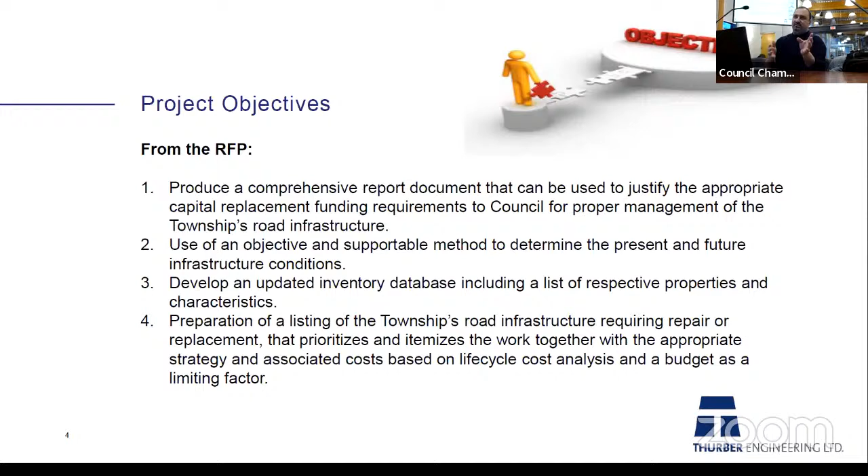We went through the development of an updated inventory. So that took a bit of work at the front end just to make sure the database was correct and erroneous data was taken care of. And then we came up with what I would call not necessarily a prioritized, but an optimized scenario list of roads that we presented to you for repair, that you can then select which scenario you'd like to do. Each scenario is slightly different, and we'll talk through the funding requirements versus the deficit that follows each of those scenarios. Next slide, please.

Next two slides. Okay, so yeah, that's perfect. So this was our collection vehicle. So we send out two persons, one of which is a pavement engineer when we carry out these assessments. The objective is to drive every road, every kilometer of road, and visually assess them by eye. For this particular assignment, we also took photographs. So this is an example you can kind of see in the middle, and then the upper corner.

We had two cameras on our vehicles. I think for this one, we only did one camera. We didn't need to do any rear facing photos, but this is what we would do if we did front and rear. So one of the objectives was to photograph every 5 meters, every road within the Township of Springwater, which we did. We still have to discuss how we're going to transfer those files to you, but Dan and I are still going through that.

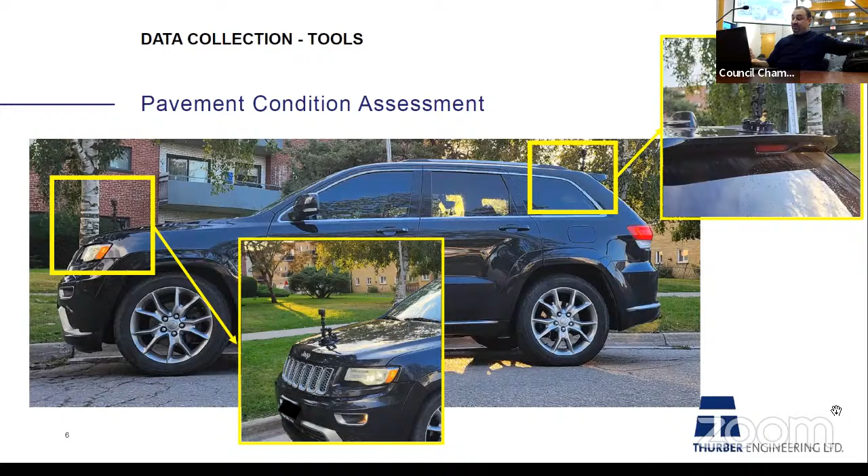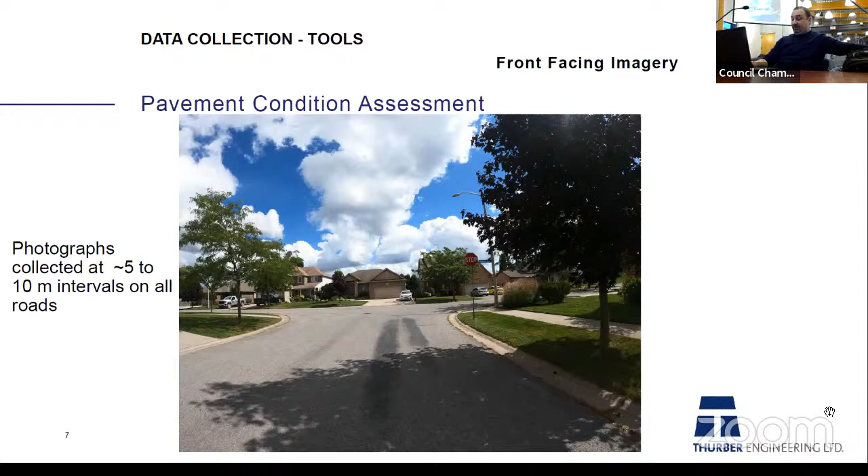In addition to this, next slide, please. I'll just show you some of the imagery. So this is some of the quality of the imagery. They are GPS enabled GoPros that are being used for this assignment. And again, for every 5 to 10 meter intervals, it's a lot of imagery, quite frankly. But the resolution is quite good. If you can just flip through the slides there, Jen, please. Okay, right there. That's good to stop.

So in addition to the photos, some of the other technology that we used was this handheld app that you put on your phone. And so what this app does is it takes the accelerometer in your phone and it will measure the roughness of your road. So as you're driving around, the phone will be vibrating slightly, and it's measuring how rough or smooth the roads actually are. So what that is generating is what we call a riding condition index. Okay, so an alternative to this would be, and this was a requirement of this project as well.

An alternative to this would be the raters in the vehicle assigning a value from 1 to 10 based on how they feel the road is as they're driving along. Quite frankly, we do that as well because we don't always trust the data given to us. So part of our QC checks is to compare what we actually feel. We've done enough roads; we have a pretty good assessment of how our body shakes in the car.

But we do go back also because sometimes the data that we collect doesn't always come through. There's always going to be some error that could happen. So it's one of our QC checks that we rate the roads by eye, and when we're doing the assessment of the roughness, we also rate them manually as well. So these parameters, the roughness and the distresses that we are observing in the road, are used to calculate what's called a PCI.

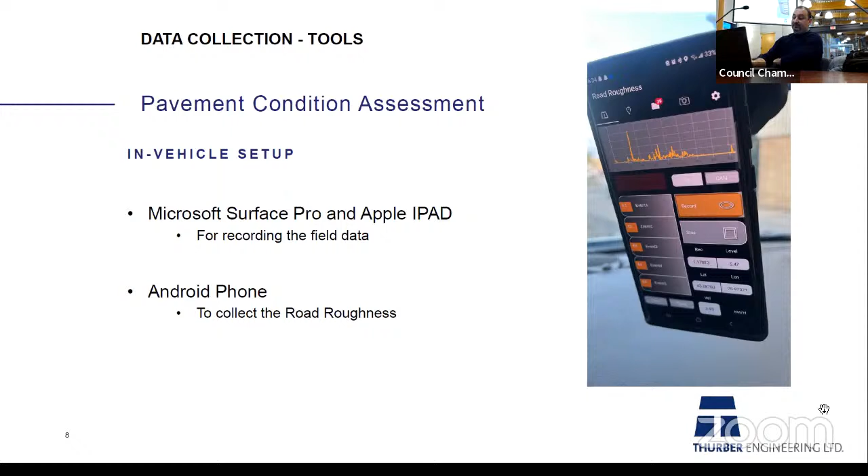So I'll just go through. Just for the record, this is the setup that we use. This is a Samsung phone with a specific mount that we mount to the windshield, so we can see everything that's going on at the same time. Next slide, please. Again, this is pretty quick.

So on the left-hand side, you'll see the manuals or guides that we followed. For all asphalt roads, we referred to ASTM per the RFP specifications. However, ASTM doesn't cover gravel or surface treated roads, so for those roads, we use the MTO manuals. MTO does have a manual also for asphalt roads, but for this particular assessment, we used ASTM.

Regardless of the method used, when you look at the center, the asphalt pavement, or even the gravel or surface treated, what we're assessing for is the type of distress or deterioration that we see in the road. So cracking, how bad is it? Low, moderate, severe, or high. The density of it, which means how much of it do we see.

With the ASTM method, it's a bit more cumbersome because we not only assess the type of distress that we see and the severity of it, so how bad it is, but also we quantify how much we see. And again, it's more of a manual calculation. MTO's method doesn't necessarily do that. It just says, okay, is it 15 to 20% of the road experiencing this, or more than 50%? It's a little bit easier to do. But the end result is generally the same.

On the right-hand side, the equipment that we used, I showed you some of it. That app on the previous slide is the Rubix app. Rubix is an app produced by a company called Rival Solutions. I'll get into them a bit more later on. Phone cameras, typically we're using any tablet, phone camera, or even a laptop, depending on what we're doing.

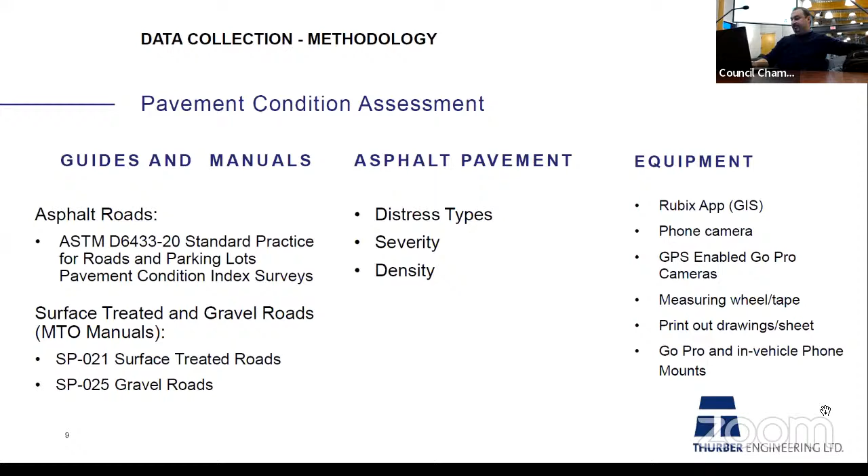So these are the sheets that we collect. Again, these are the MTO forms. The ASTM forms aren't very nice to show; these are a bit more clear. The premise is the same. Basically all the types of distresses are listed, whether they're slight, moderate, or severe, and the extent, so how much of the distress did we see. So whether it's ASTM or MTO, the methodology is generally the same. The output is the same.

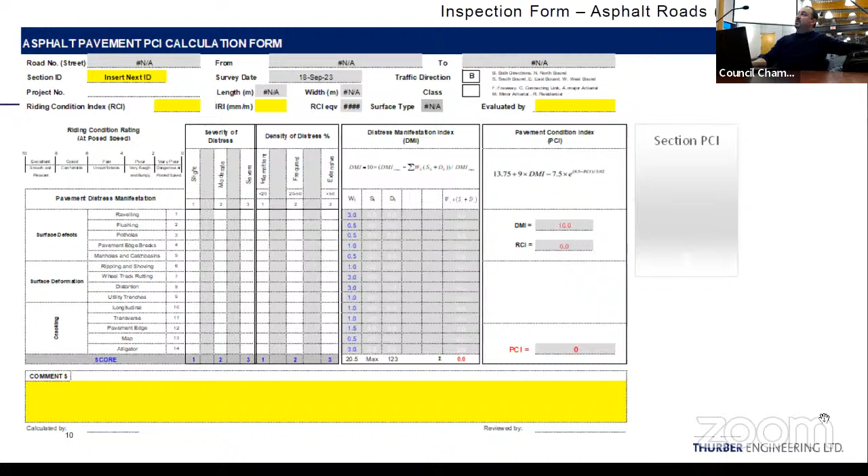If you look in the lower part, where it says PCI, that's the calculation output. We're going to talk a lot about PCI, which is Pavement Condition Index. So don't worry about it right now. Park that, and we'll come back to it. The next two slides, Jen, please just push through, you can skip that one. That's for gravel and surface treated roads. They're generally the same. I just wanted to post them up there so you'd have them.

Next slide, please. So once our assessors in the field bring the data back into the office, we go through a gap analysis and make sure no data was missing, or if there's any erroneous data.

Typically we like to refer to the previous study and see, did a road that was once assessed as a PCI of 100, which is perfect, drop to a 50, which would be basically catastrophic, in 3 years? So I personally go through the data, or another engineer, and will actually do a 10% drive of the entire road network again, just to check the data to see if I'm seeing what I'm seeing. And I'm going to get into what these numbers mean a bit more, so this will be a bit more clear.

The other thing that we did, and we spent a lot of time doing, is the GIS shapefile. The shapefile, when we first got it, it wasn't bad, but there was duplicate data, which could pose problems when we're generating capital plans, because you may have two roads in there that get hit twice. So the capital plan's not even. So we spent a lot of time cleaning up that data.

When we're doing the road analysis, typically with GIS, it's a road from and to. So it's typically intersection to intersection, generally. But sometimes there's overlapping, as you can imagine. We don't always pave intersection to intersection. We may pave 400 meters past the intersection. So we have to double check that those variables are getting calculated and carried as well.

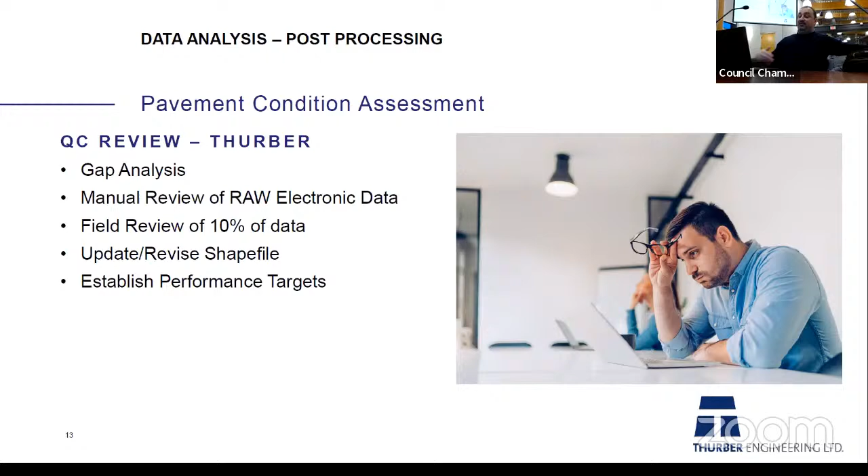And then following that, what we do, and Dan and I did this together, is we establish some performance targets. There's general performance targets that we use in industry. However, each municipality is able to do what they want, and they have some standard ones that they use. So that's what we did. Next slide, please, Jen.

So performance targets are essentially what type of treatment are we going to introduce at what time? Okay, so keep that in your mind for now, and I'm just going to focus on the right-hand side of the presentation for now. So PCI, again, pavement condition index, is a rating from 0 to 100. It's pretty straightforward, and this is global. So anywhere you go in basically North America and parts of Europe as well, they use a very similar scale. The scale you see on the screen is the ASTM scale.

MTO has a similar scale. It doesn't have the same PCI categories. So for instance, it doesn't have a 0 to 10 failed category. They kind of group a few things together, but that's okay. This is fine. So what's important here is to understand when we are interjecting in the pavements. So you can see that any roads that have a PCI rating of 71 to 100 are good or satisfactory. Those are our preventative maintenance treatments.

So preventative maintenance is essentially things like crack sealing, pothole fixing, maybe microsurfacing, just on HMA roads, or maybe you're just scarifying gravel roads. So we have a specific set of criteria we're going to fit into that category. Then we get into the rehabilitation category, which is the poor and the fair. So 41 PCI to 70.

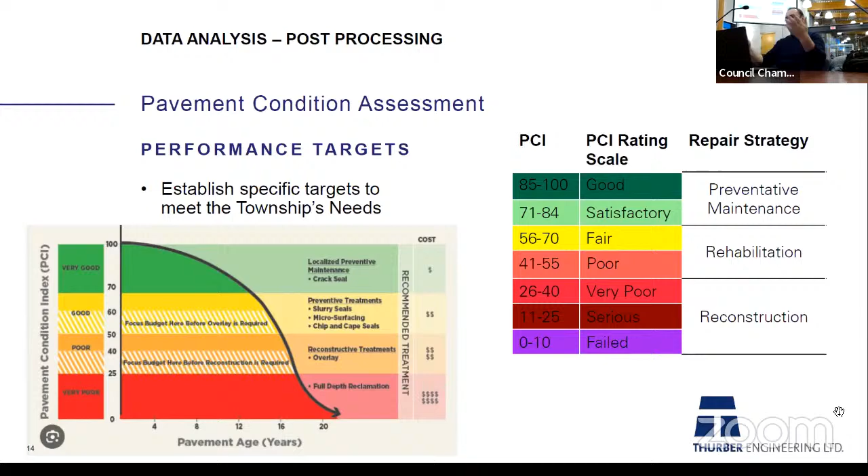Okay, next slide, please. So Rubix, again, Rival Solutions, we've partnered with on this. They're one of our two sub vendors that we used. Rubix is the name of the software. And again, for this assessment, what they did for us was we could store all of the photos that we took georeferenced into their app. So they're currently on the web, and they're available.

And they also calculated, it's in the second bullet down, the road roughness, international roughness index. So we did calculate, I mentioned road condition index or ride condition index. IRI and RCI are very similar. There's specific formulas that are used to relate them back to PCI. So essentially, to make it very simple, the DMI, the distress manifestation index, is how bad your roads are in terms of visual distresses that we see. So how much cracking we see, the type of cracking, the type of raveling, rutting, etc.

We take that and we assign that a number. Then we take the IRI and we assign a number to it. That's how rough your roads are. So as you're driving your roads, how bumpy or smooth are they? We take those two values and we plug them into a formula and we generate the PCI. So the old way of doing it, again, is very subjective. It's me driving your roads and saying, this is a 72, this is a 50, this is a 49. This is more of a calculated method so that it's reproducible.

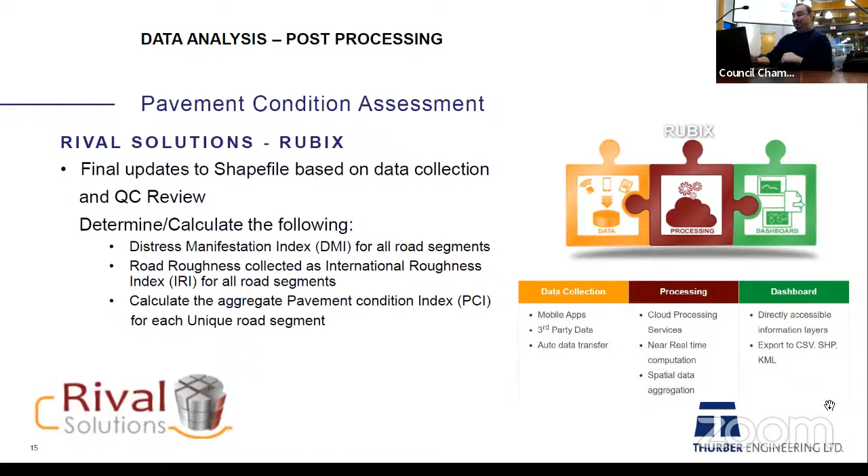Next slide, please. So your network. Yeah, okay, perfect. So I've tried to put the rating scale on the left just as a reminder throughout, because I know it's maybe the first time for some of you that have seen it. These are just some images that we pulled from the software that we're using. So basically, that's the Springwater network. And again, this is a web-based app.

Another vendor that we're using, we plug all of the PCIs into their software, and that's the capital planning tool that we use. So this is actually from their app. They just took a screenshot of it. So basically all of the green roads, and I would say yellow and green, those are your fair to good roads.

So you can see just visually, the network's in pretty good shape overall. Yes, there's going to be red roads, and that's fine. Elmvale's pretty green, but you can see it's got a variability; there's one failed road, but off the top of my head, I can't remember the name of it. And then we go down to Midhurst, and there's actually a lot more red in Midhurst.

So this is typical of any municipality. But it also can show you just visually, if you didn't want to look at this capital planning, where we could spread it around. But if we went with the old method, we would just take all the red roads or purple roads and say, okay, fix all those. But what's going to happen if you do that is all your other roads that are in the light green or the yellow are then just going to drop to red. You're going to end up in a very bad place spending your money.

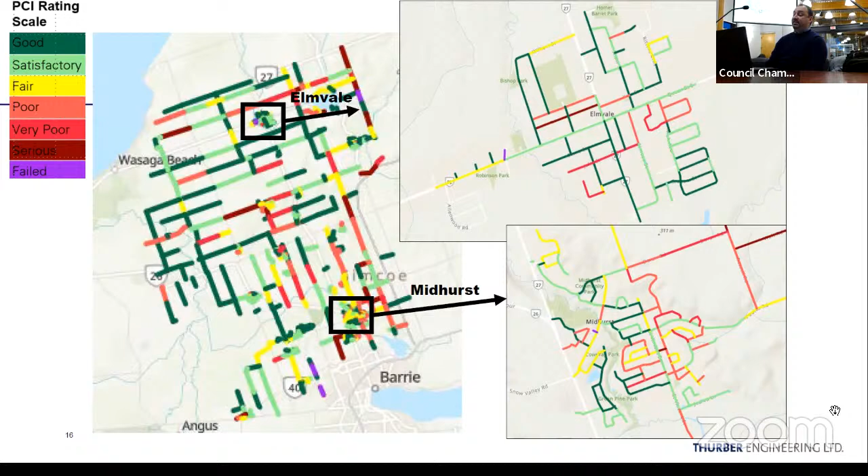This company has done, oh, next slide, please. Sorry, Jen. I'll apologize. Yeah, there it is.

This is from their web-based app, and this is the dashboard that we see when we first come on. So your network overall is on the top left, and I think I have these zoomed in per slide, but we'll go through them quickly. Your overall network from a PCI rating out of 100 is 72. It's called satisfactory, but really that's a good network. If you're at a 72, you're in a good place right now. If you're at a 50, there's a lot more spend that needs to be taken care of.

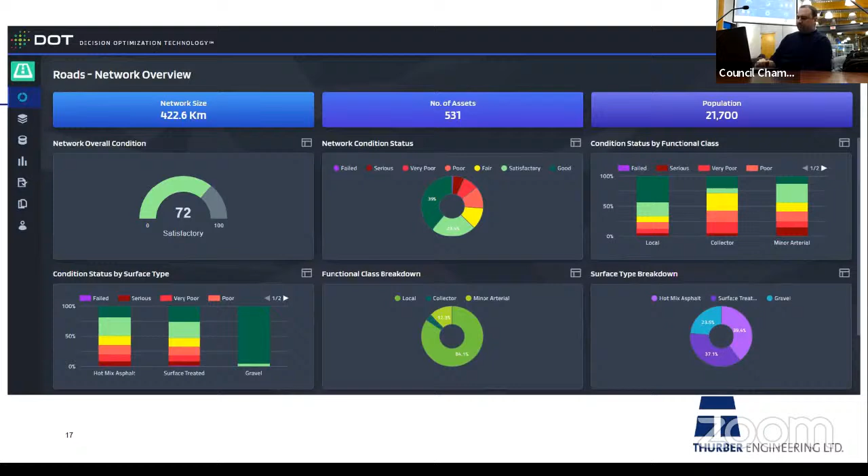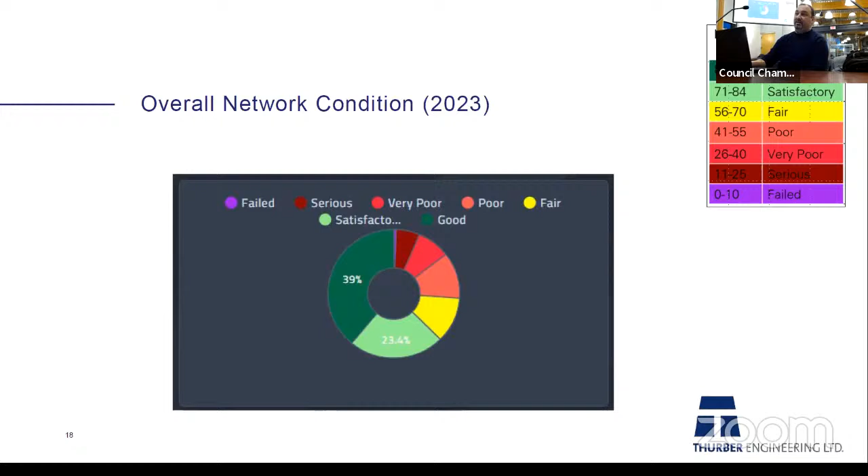So as we go through, Jen, if we could just go next slide, I'll just zoom in. So this is a pie chart of the network condition, and this is based on kilometers of road, not number of road segments. I should be clear about that. You can see there's one sliver of failed road. It's a very small amount. But predominantly about 63% of your roads are in the fair to good category. So part of this is going to be understanding how we take care of those roads moving forward.

Next slide, please, Jen. I'll just go through these quickly. This is a bar chart, just another way to look at it, of the functional class. Functional class being per the township official plan, we have local roads, collector roads, and minor arterial roads. There could be more depending on the municipality you're in. These are specific to the township. And so on the left, your local roads are the first bar. You can see about 70%, or maybe more, 75%, are fair to good.

So your local roads are your residential streets, if you will. And then your collector roads are all your connecting streets. And actually in the township's official plan, they're very specific as to which roads these are. You can see there's a greater amount of roads that are in the poor to failed or poor to serious condition. And then the arterial roads are almost 50-50.

So what's unique about the software is, with a worst first approach, you would just rate your roads PCI 0 to 100 and fix the worst ones. What we can do in the software is say, okay, you know what? Our arterial roads are our money-making roads. Those are our major routes being traveled by industry and people moving place to place, in and out of the township. We want to put slightly more weight towards those roads. And then you can assign, say, 55%, then 50%, 40%.

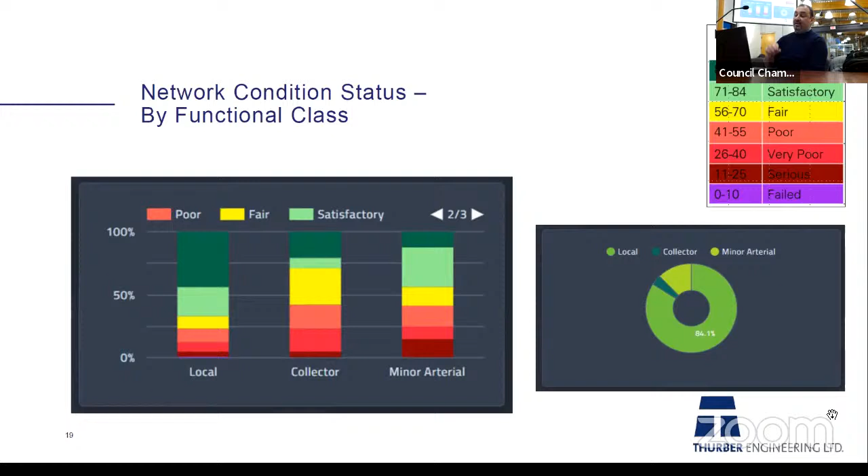You can put the weighting differently for each type of functional class. And this is going to be the story. Next slide, please, Jen, as we go through.

So for surface type, same thing. You predominantly have hot mix and surface treated roads. There's some gravel roads. They were typically in good condition. This is the uniqueness of the condition assessment. Depending on when we go out to do the condition assessment, you may have just graded all of your gravel roads, so they may come out, and that's fine. It's gravel roads. We know they're part of a regular plan every year, but this is why the gravel roads are in great shape, and actually that helped drive your network up because I think they rated out at about 96 PCI on average.

But your asphalt roads, they're pretty good too, so that's good. I mean, your surface treated and asphalt roads are from good to fair, well above 50%. And again, this is why your overall network condition is a 72. That's satisfactory. Next slide, please.

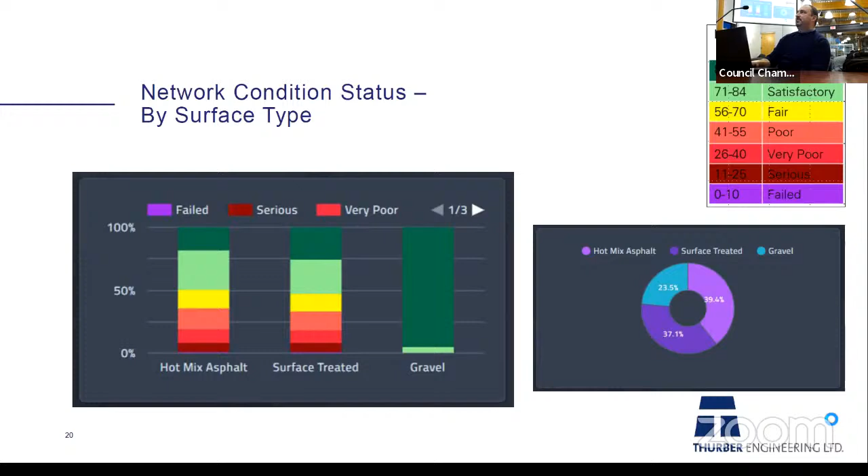So I've talked a lot about this PCI, so I just wanted to outline, what does this look like? Okay. And I promise you, I did not pick these roads for any particular reason. If anybody knows these roads, I'm sure you do. I'm not picking on them. They just happen to be the ones that I came across that had images that I could show.

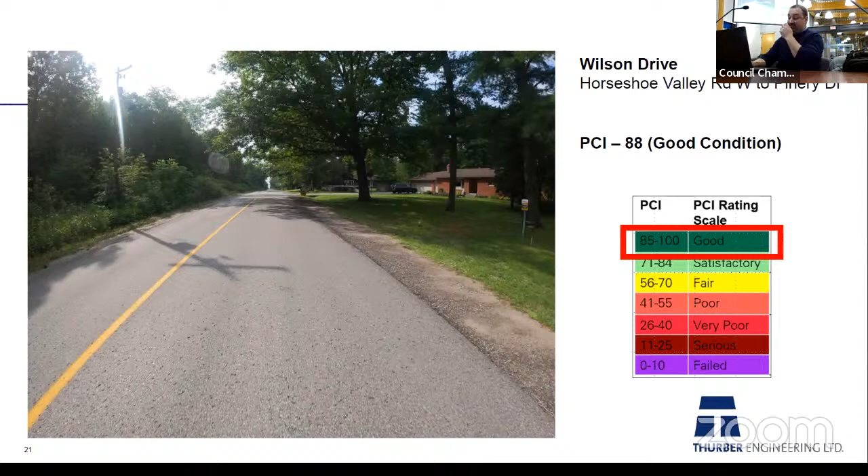And again, I'm giving you a snapshot. The one thing I want to point out is it's not this particular spot on the road that dictates it. It's the full length of the road. So we obviously saw similar types of distresses throughout the length of the road.

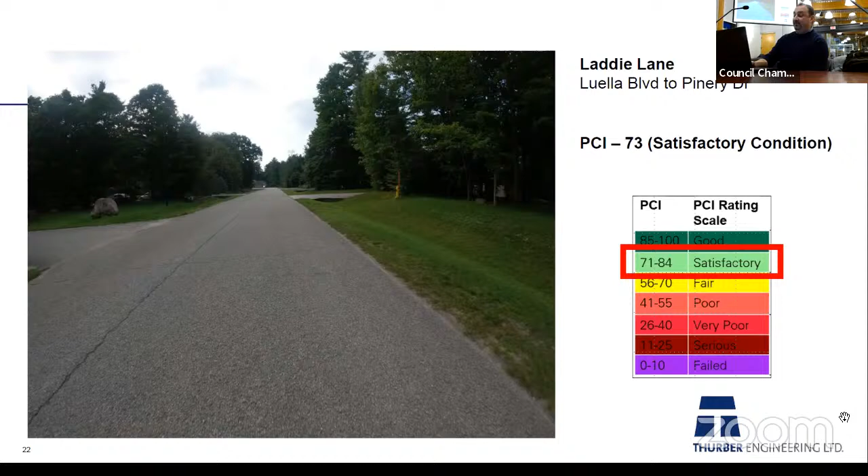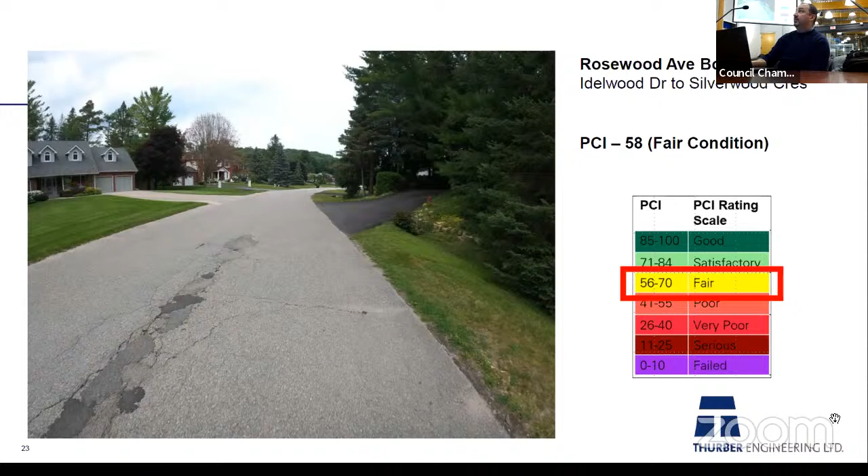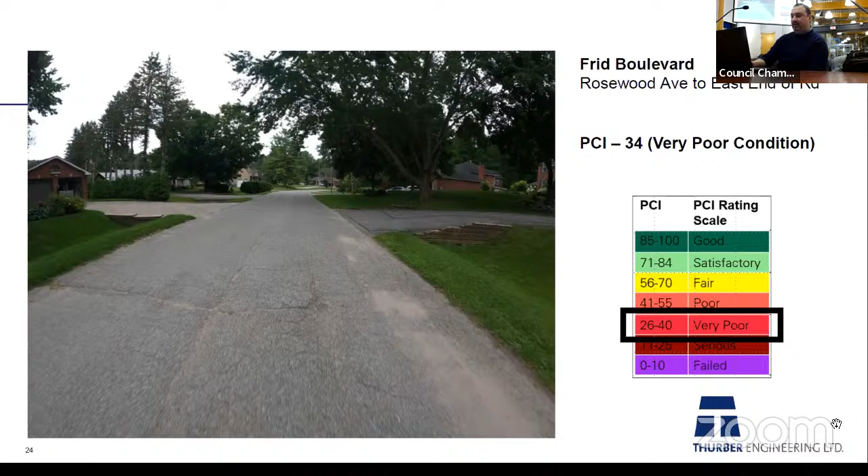The one thing I would say about the MTO method versus the ASTM method is because ASTM is a calculated method, our raters are actually assessing and quantifying the amount of distress, whereas in MTO world, if the road has a distress such as this, and it's just greater than 50%, it's treated the same as a road that is like 95 to 100% of the same distress. ASTM, it's quantified. So because it's quantified, we get lower ratings.

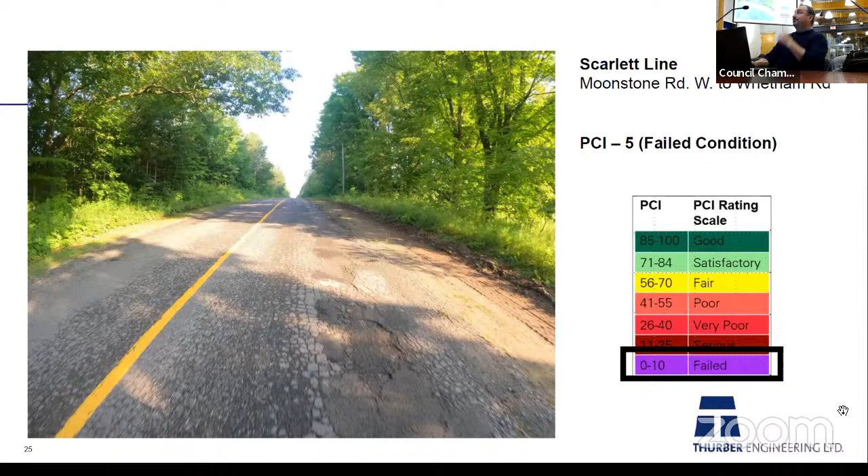Okay, so it's important to do this because when we first ran through the scenarios, we didn't have some of these. You don't have to go anywhere, Jen, I'm just speaking out loud. If you go back in your minds to that graph that goes down, if we don't have certain treatments at certain levels, it skips to the one next to it. So it actually creates a bigger need than you actually need. Instead of doing a slurry seal, which is cheaper, it'll go to almost a major rehabilitation, which is more costly. So that drives the costs up.

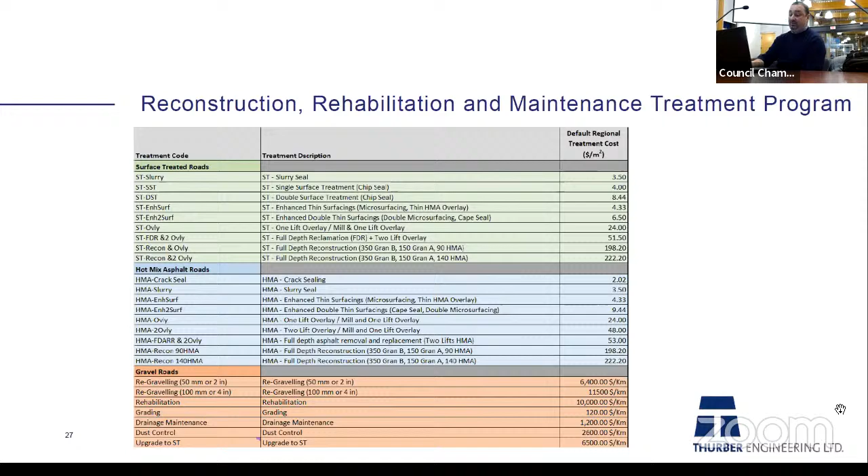So this is why we can train ourselves, and the program, to think a little bit further and maybe bring new technologies to the township. Next slide, please. I've talked a bit about Infrastructure Solutions. So DOT is their software. Again, I've used it for many years. It's grown legs. When I first started using it, they only did roads. They now do the full suite of assets for a municipality, if that's interesting to you.

But what's interesting about it is, in addition to the capital planning scenarios you can generate for your roads, there's operation efficiency analysis, but there's also cross analysis. So they'll develop your plan for your roads, and it'll cross over and look at your sewers and water mains. I pick on them because that's the biggest culprit to ripping up a new road, because nobody talked to each other. So they'll say, well, this road might not need to be repaired yet, but we're going to be doing the water main soon, so let's move it up in the list. So again, it's not looking at just worst first.

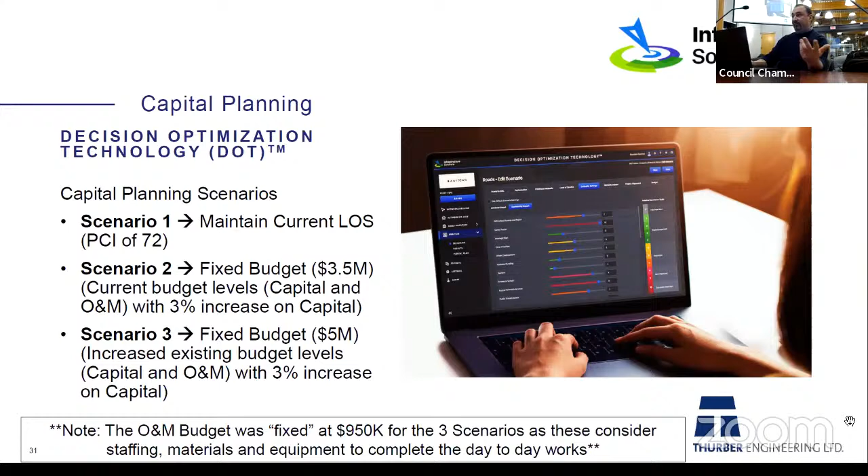What's important when you look at these charts, and I stress this, is don't just look at one particular period. Look at the whole graph and how it changes. Okay, this is what the network condition would look like if we spent 3.5 million or 5 million over the course of 10 years. And I'll get into the other one as well, the maintain.

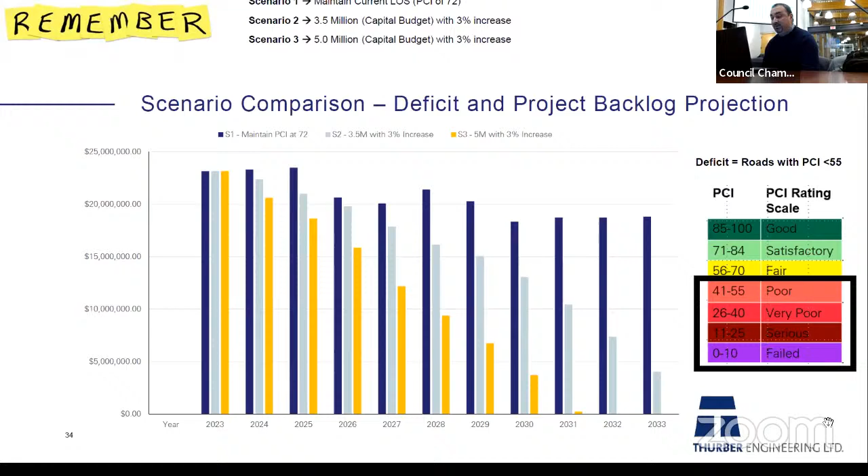So this is just one thing I wanted to point out. That's the big reason why they end up at 81 together. We don't need the same treatments come year 2031 as we do 2033. Okay. Oh, right. So then this is the capital expenditure. Sorry, next slide, please, Jen.

The first one, scenario 1, again, that's your level of service. You can spend an average 3.3 million. You're probably wondering why 2028, or the odd years, are sort of lower than other years. That's strictly because we're trying to maintain a 72. So the tool is saying, okay, I've got to put emphasis on these years, but I'm already at a 72, so I can focus more on preventive maintenance treatments in those other years, which are cheaper. That's why it has that bell pattern.

Scenario 2 again is current, so that's what you're doing. It's pretty consistent across the course. And scenario 3, that's why I've highlighted it. By 2031, that's where your deficit is basically nil. It's quite significant. Now, I don't actually think that would be true, but this is what our software tells us. So this is why we have engineering judgment and put it into play. Next slide, please.

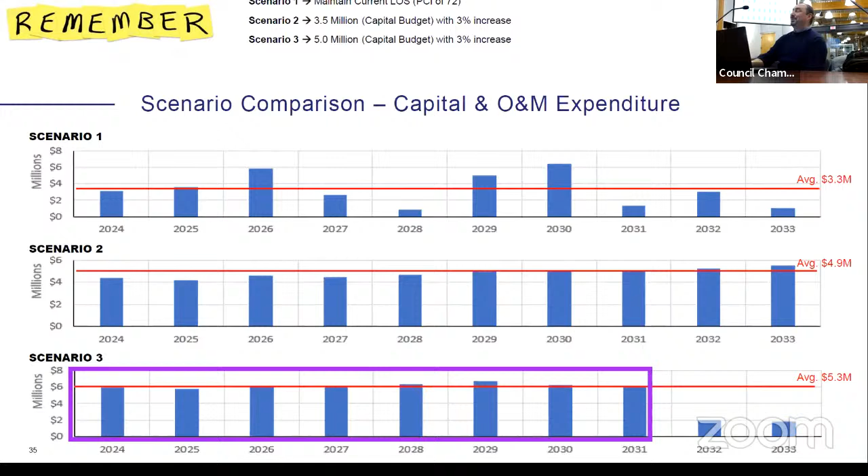Scenario 1 will show you what you would need to do over a 10-year period to maintain it at the current state. But I want you to keep in mind those few slides ago, if you do that, your backlog is going to be huge. And that's a bit of a pressure point for me. I think if you do that, you're really risking something going wrong and then you have a catastrophic failure where you need to do a lot of roads at one time. And again, I don't know the development picture, but it's worth considering.

Scenario 2 is basically what you're doing now. So it's a good amount of money that you're spending now. You will significantly reduce your deficit to just about 4 million by the end of the 10-year period, roughly. And you're spending about 4 million a year. And then scenario 3, basically, in the perfect world and if everything stayed true as it is today and it carried through for 10 years, you could eliminate your deficit almost by year 8. But I won't tell you which one you do. That would be unfair. That is all I have.